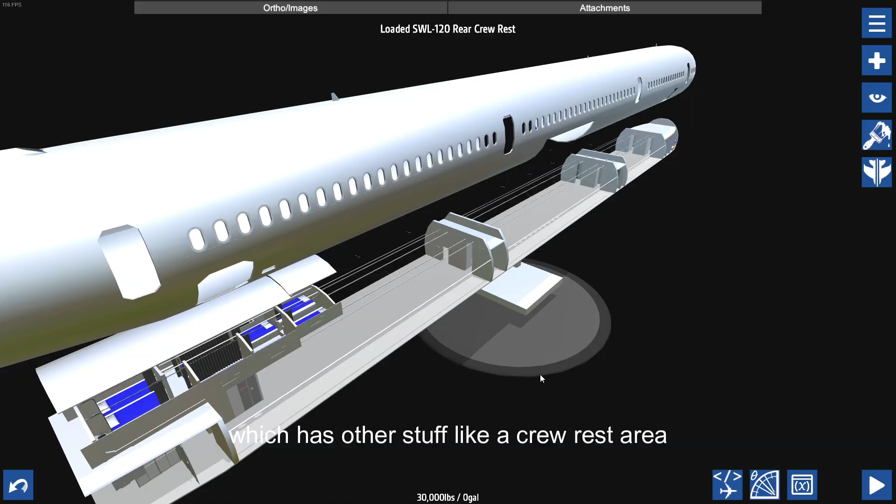Since my last video, I haven't just worked on one certain project. I've actually worked on a lot of things, like this livery, a whole new interior with other stuff like a crew rest area, and some modifications to the engines, and a lot more. I think I'll start with the livery since that's where I left off in the last video.

Since the idea for the whole plane is that every single aspect is insanely realistic, I also need to make some liveries. This is the Snake Air livery, a fictional livery. I guess it would come from the same world as Snake Wonderland, which is what SWL means. I didn't design this livery myself - it was designed by someone called Republic of Coast Planes.

The way I made this livery wasn't using fuselage slicing or labels - the entire livery was 3D modeled outside of the game. So the fuselage part is one part, and everything else is also one part. For the rudder, I have one part for that, and anything else the livery happens to cross over. It even includes this tiny little bit in the door - that's also its own part, and same for the other side.

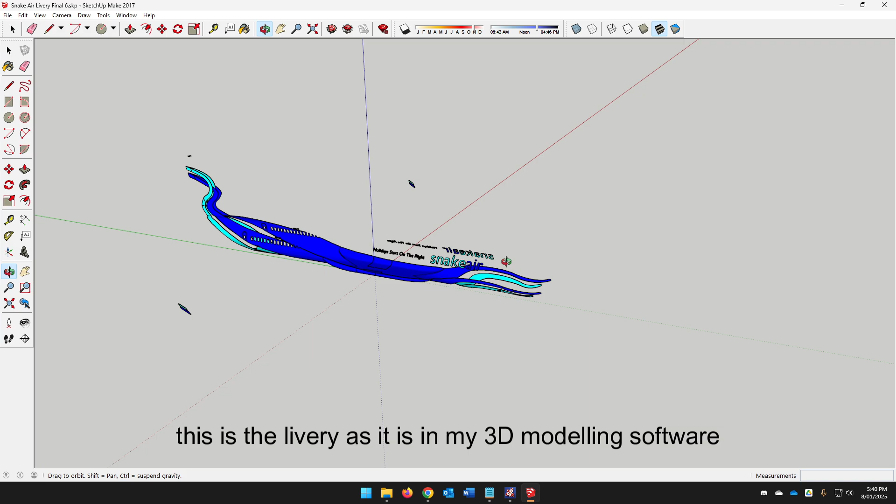This is the livery as it is in my 3D modeling software. Not much to say here, it's pretty simple. The way I did this is I exported the fuselage itself, added that to the software, and then modeled around it.

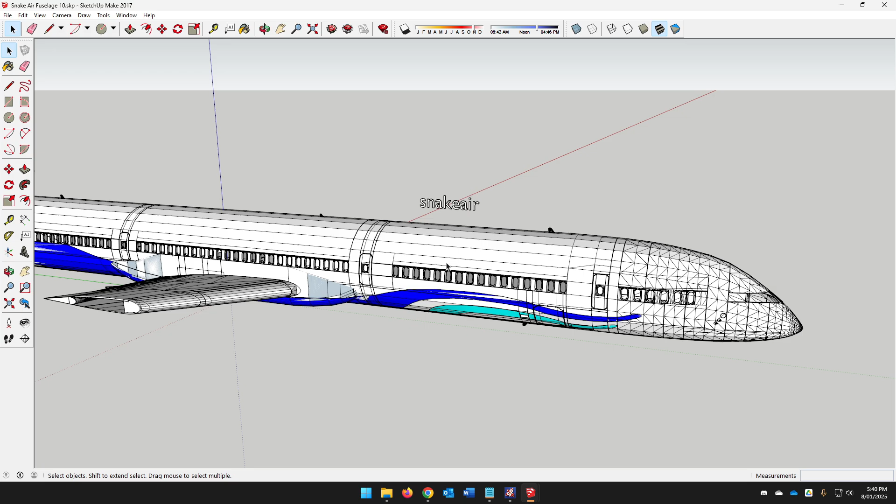The fuselage isn't in this final version since I was about to export it and put it in SimplePlanes, but if I go back a couple versions to an early version, you can see how I did it. I just use my reference image, or make up whatever I want, and then go around the fuselage and draw lines on it.

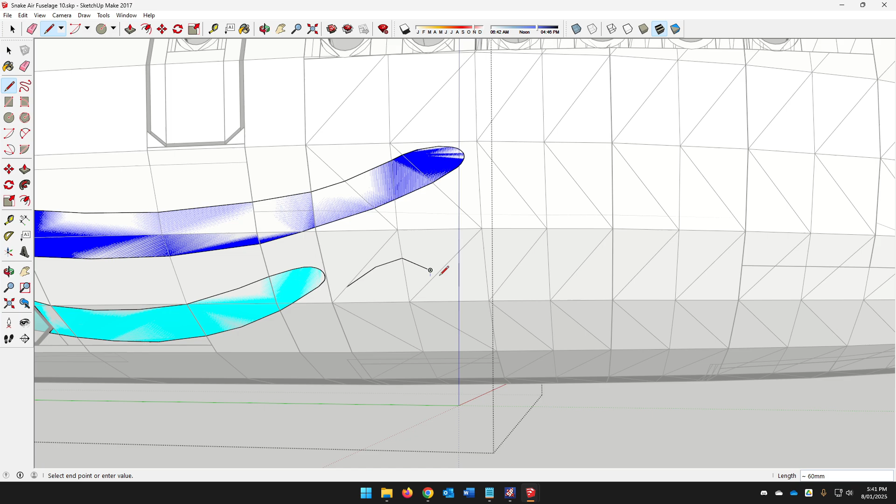It's not really good, but that's just because I'm showing it quickly.

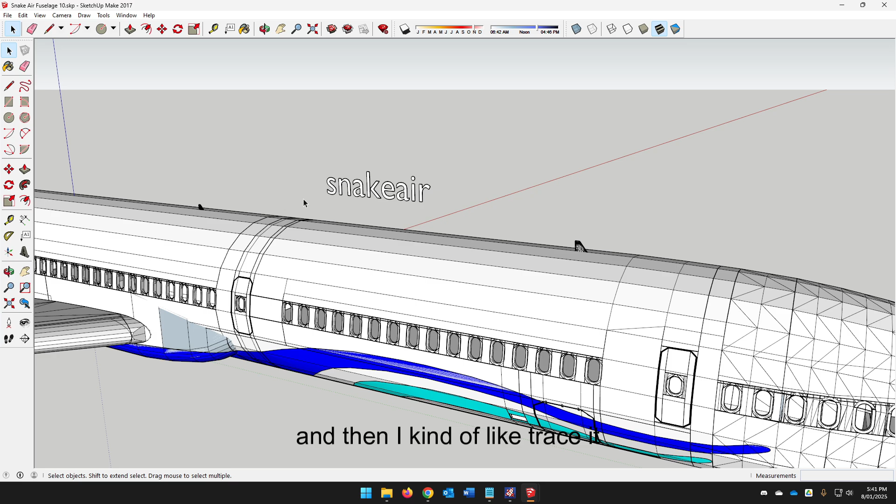For the text, I went to Blender, because while I could do it in this software as well, this was a specific font so I had to go to Blender for that. I go to some 3D text, and kind of trace it onto the fuselage - well actually I don't trace it. What I do is make the text more like a 2D shape, and then draw a line, though I'm not sure how well this is going to work showing it this quickly.

Then I can select the most lower parts of the line. It's not going to be pretty since I'm showing it briefly, but then I just rotate it like that. You can see some other stuff went with it, but that's just because I didn't select everything. This is how I curve the text to match the fuselage.

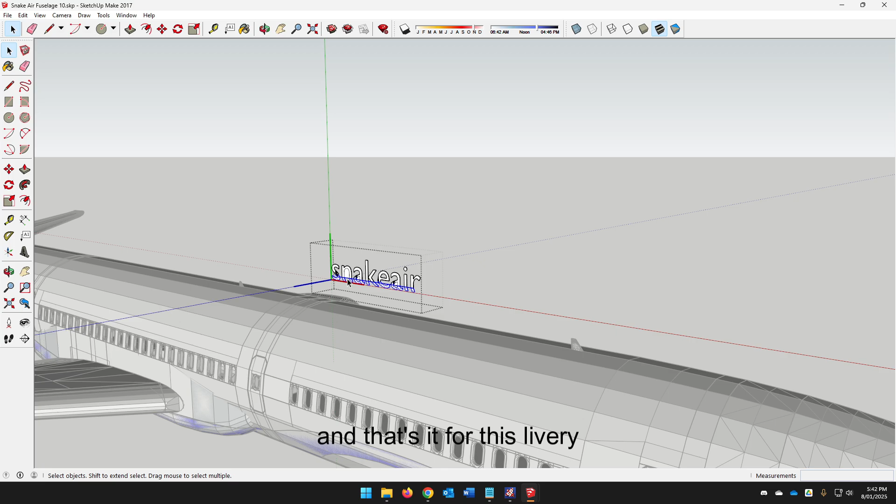That's about it for this livery. I do have some other planned liveries, some being real ones and some being fictional ones, but I don't think I'll start working on them for another couple months.

The other thing I said I was going to work on in my last video is the landing gear override switch. It's pretty much the switch that if the hydraulics fail completely, you can click that switch and the landing gear can then be extended - well, not manually, but it's just an alternative method of extending the landing gear.

If we have a look at the cockpit, let me just turn on the cockpit first. I've made a few modifications here, went ahead and redid the entire center panel. This is that landing gear override switch, and I added a few other things here as well. We have the lever, which was always there, and then if I just turn on some hydraulics by starting the APU.

At some point I also made this APU information panel, just a bunch of basic information about the APU. I tried to make this realistic based on real life, but I couldn't find much information on APUs, so I just made it seem more realistic.

That's all there is to it. These are all just simple functions based off the actual APU core. And now with the APU started, we can now look at this landing gear panel.

After turning on the hydraulics, of course, the system ready light will now light up, indicating the landing gear system is ready. Down here we also have the alternate active light and the extension switch.

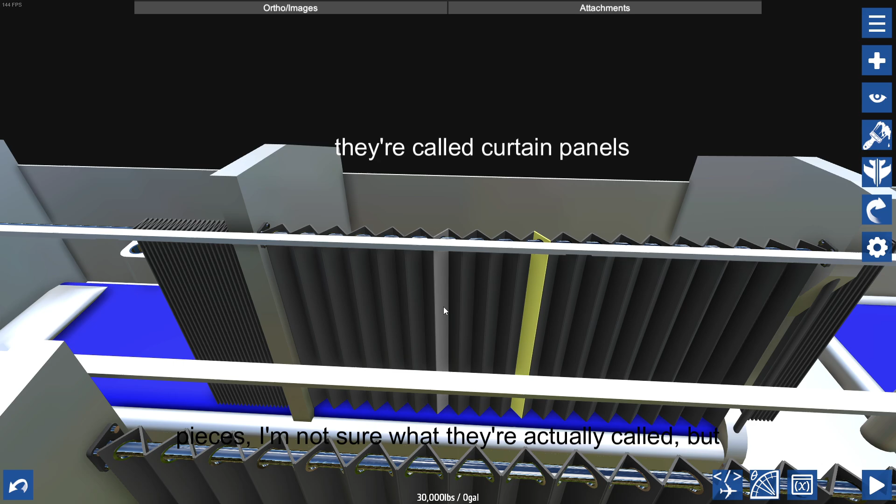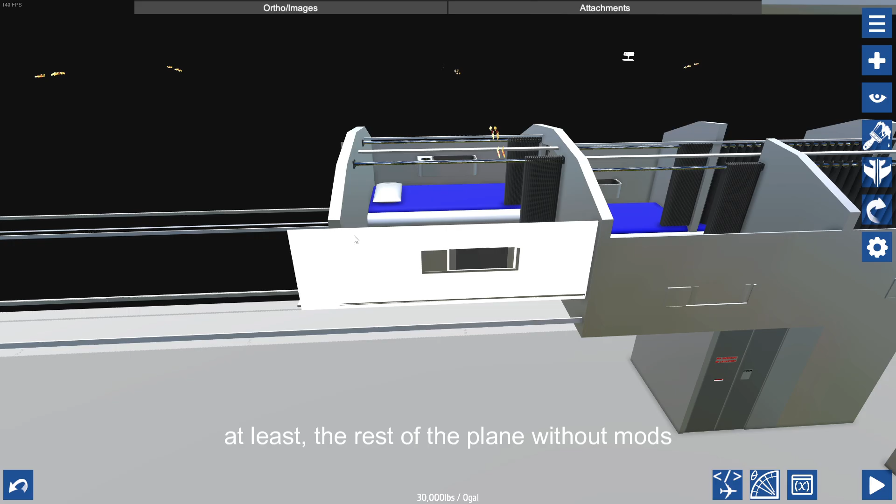Currently we're at over 1,000 parts. This is like nothing, this is all just one part fuselage. So 1,000 parts for this crew rest area, which isn't that much compared to the rest of the plane - at least the rest of the plane without mods. There are a total of 9 beds here.

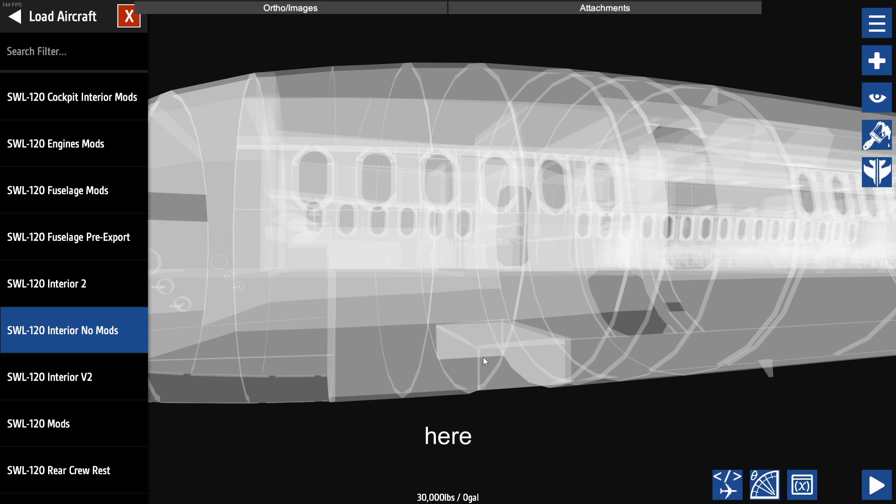Now, I haven't done the pilot rest area yet, but it's going to go underneath the Ultimate Class cabin. So if I just load up the other version, it's going to go underneath the floor in either here or here. Now this bay, I might actually take this bay out completely - this bay is not actually there in real life.

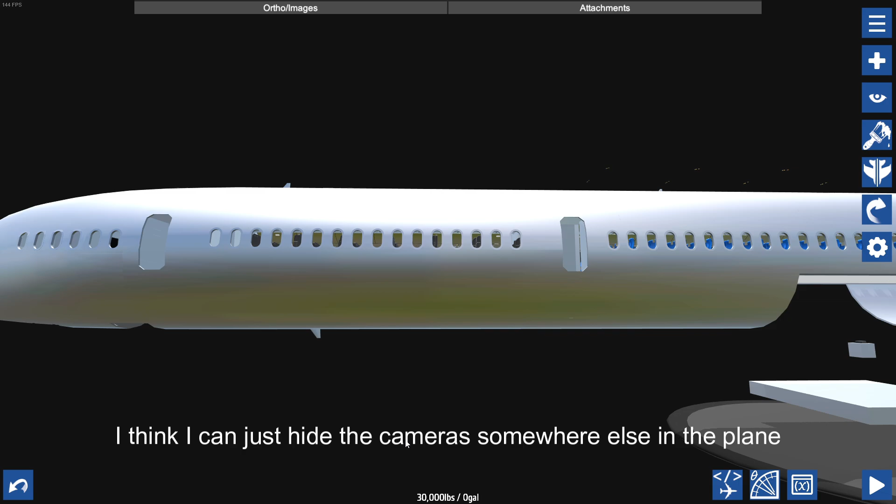I put it there so I could store, say, a bunch of cameras that are attached to other things, like a pushback tug with some other vehicles, so you can have a better view of those if you're controlling them, like you spawn them as an AI plane, then just drive them around. That's what this bay was going to be used for, but I think I can just hide the cameras somewhere else in the plane. I don't need a whole bay with them, but that's something else to work on in the future.

That is about it for the new interior and some other stuff. On the plane, I have some new landing gear rims. These are part of the upcoming car parts mod that me and Embassy are working on, so I figured I'd add these landing gear rims to my own wheels. Pretty simple.

And the other new thing, which is actually a pretty big thing, is the new cockpit screens. In the current plane, I have this one, actually they're over here, I'll show you in the level. In the current plane I have just some cockpit screens using labels. Actually, as of right now, the whole cockpit is fully vanilla, at least in the main plane. They have these labels - this is all vanilla.

But what I'm working on, because these are very laggy and they don't look perfect, is adding modded cockpit screens. This is the work-in-progress primary flight display, and it is fully animated just like the real thing, at least the parts I have already made. I need to add a lot more. Let me just jump to it in the air.

See how the speed tape is animated. There's an input controller for each of these digits. Each of these digits are actually just textures on a block - this is all test textures, that's just how it works. They're not models, they're just images that are all moved around.